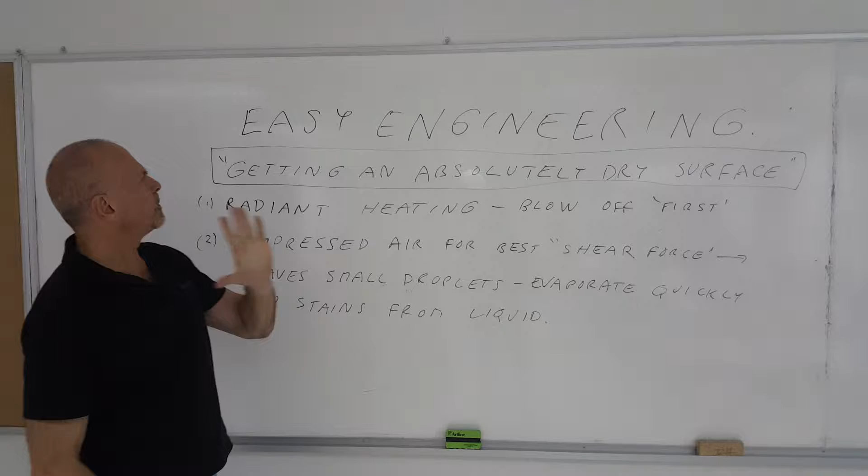Absolutely dry. Some parts that are being produced or packaged, you want to have that surface absolutely dry. So what's the best way to do that?

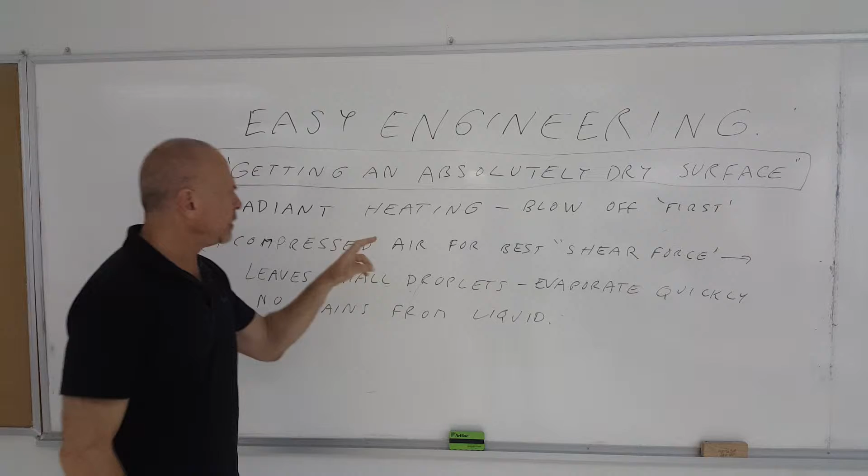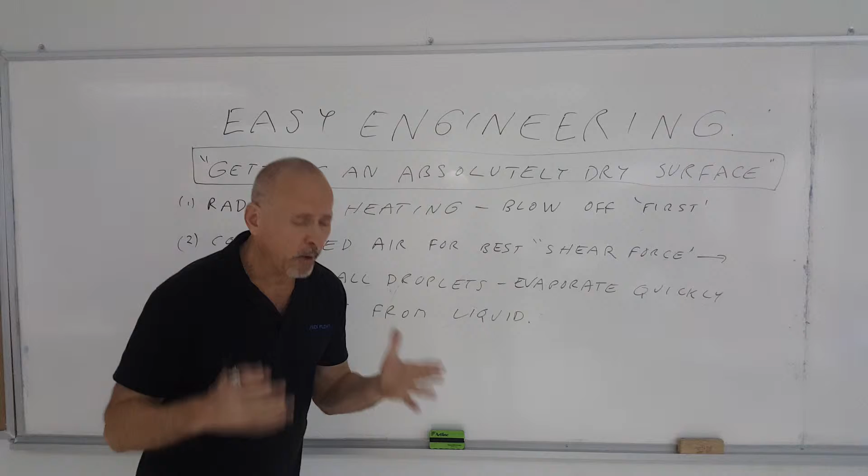Well, first of all, you can apply radiant heating. But if you're going to use heat to evaporate a liquid off a surface, you have to consider a few things. First of all, if the product is very, very wet, it's going to take additional time to evaporate that liquid. Plus, you're going to be using a lot of energy in that radiant heating to evaporate that liquid.

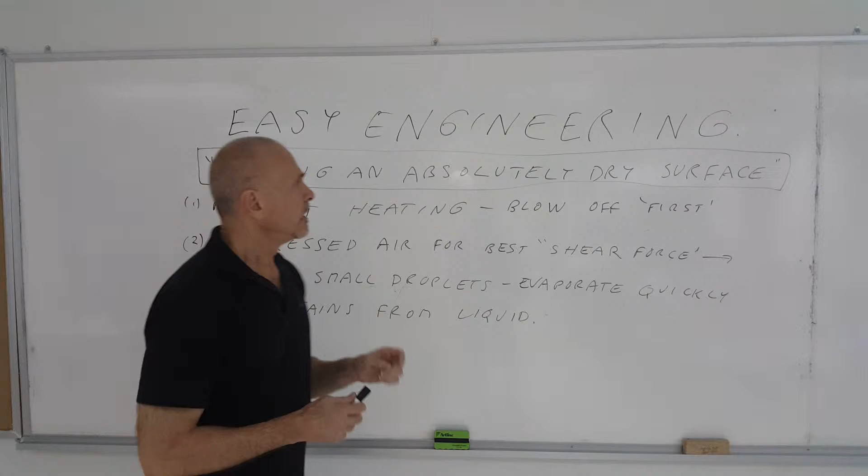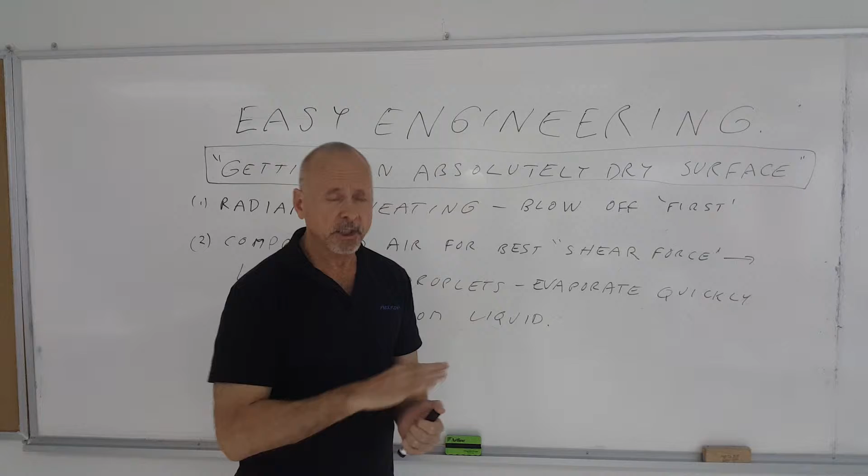So you want to blow it off first. Think about the logic of that. If you have a very, very wet surface, it takes longer to evaporate. If you blow off all that excess liquid initially, it's going to evaporate a lot quicker.

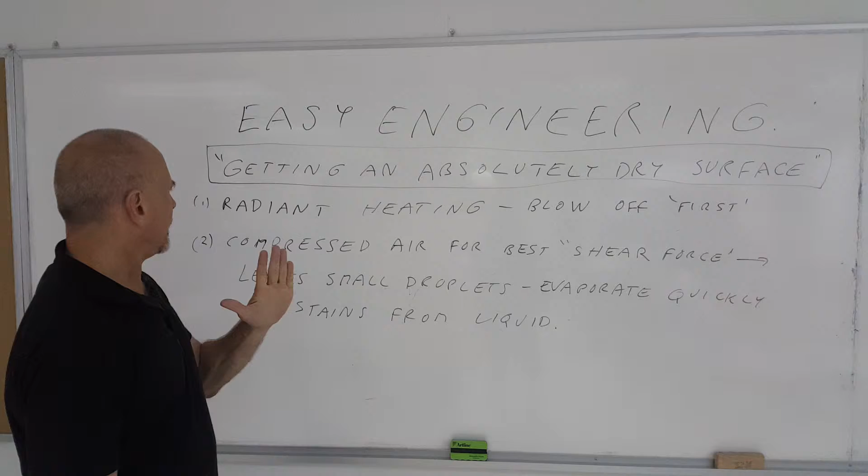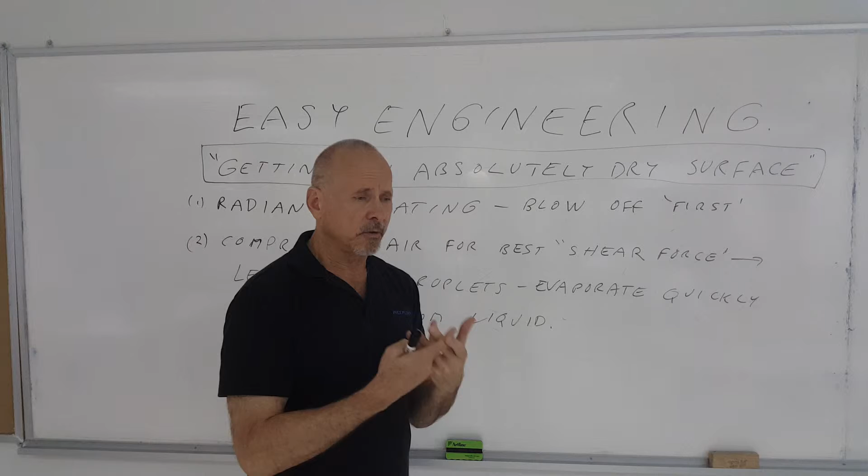Secondly, compressed air gives you the best shear force to get this liquid off. If you use compressed air over a blower, this extra shear force leaves behind very, very small droplets of liquid. So the radiant heat, if used, can evaporate these small droplets a lot faster, therefore keeping your production speed high.

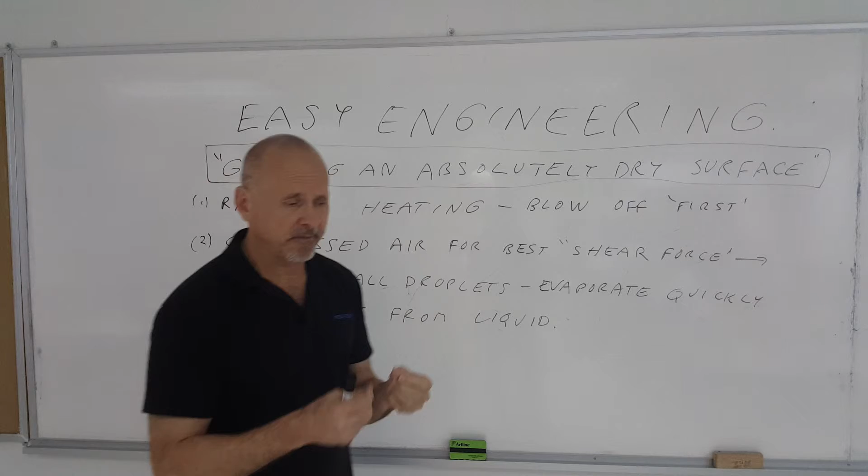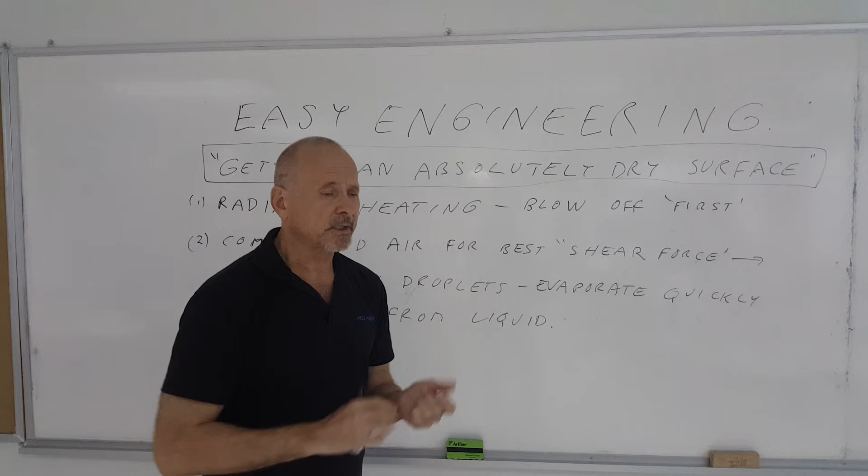If you use a blower system, you might have larger droplets, and you also may have stains, because depending on the liquid you're using, if you try to evaporate liquid and it has some chemical in it, that liquid could leave a stain on that part. So a blow-off using compressed air, leaving the tinier droplets, will avoid having that stain occur.

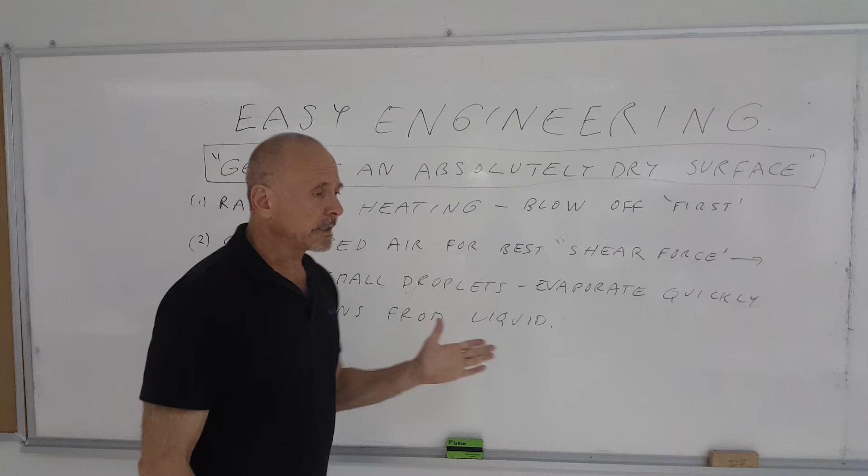So, the nice thing about compressed air is you get a good shear force, these very small droplets that evaporate fairly quickly, especially with radiant heat. And in some cases, if the production line is slow enough, you may not even need to have the heat. It'll evaporate just on its own, and no stains from the liquid.

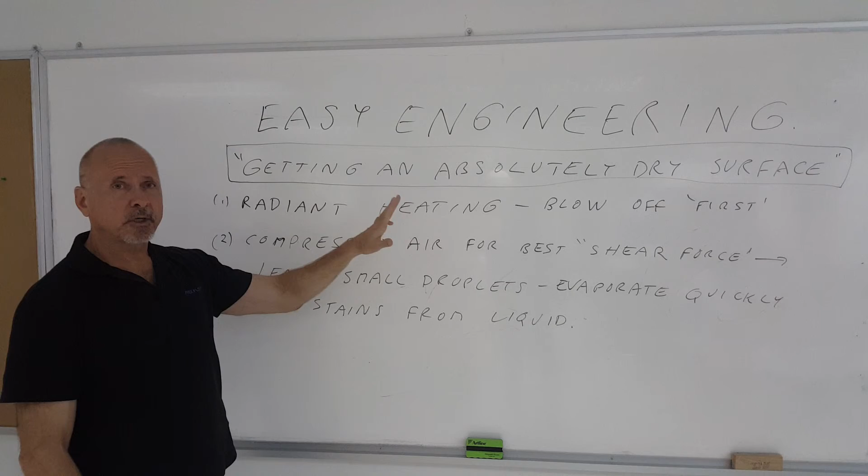So, if you want to have an absolutely dry surface, these are the things you should consider in utilizing compressed air and radiant heat.